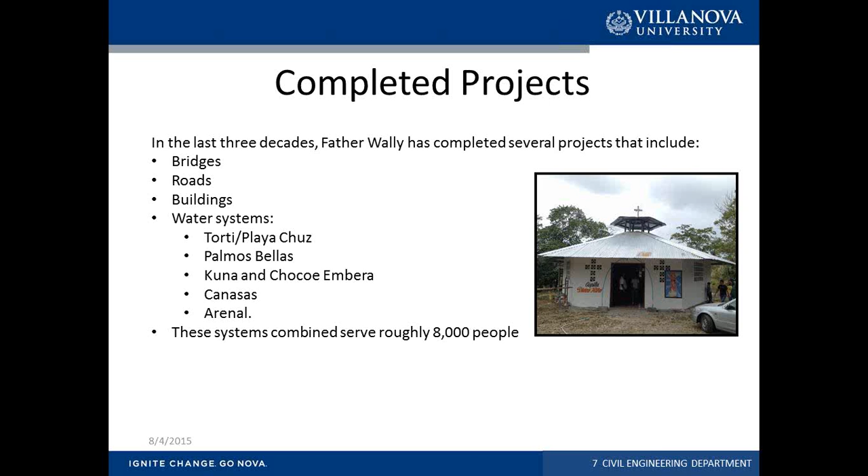The entire water distribution system is gravity fed, except for the new one, which we're working on right now, which I'll talk about later. Most of this area, you can see the blue lines are contour lines, so you can get an idea that everything to the left here are contours. It's very mountainous, steep mountainous area, and then it flattens out.

All of the area to the right is pasture, farmland. All the mountains are pretty forested with lumber, and one of the woods that's very prevalent there is teak. So there are people going into the mountains harvesting the teak wood. As a matter of fact, while we were there, this line down here was broken by the foresters, who actually ran over the line.

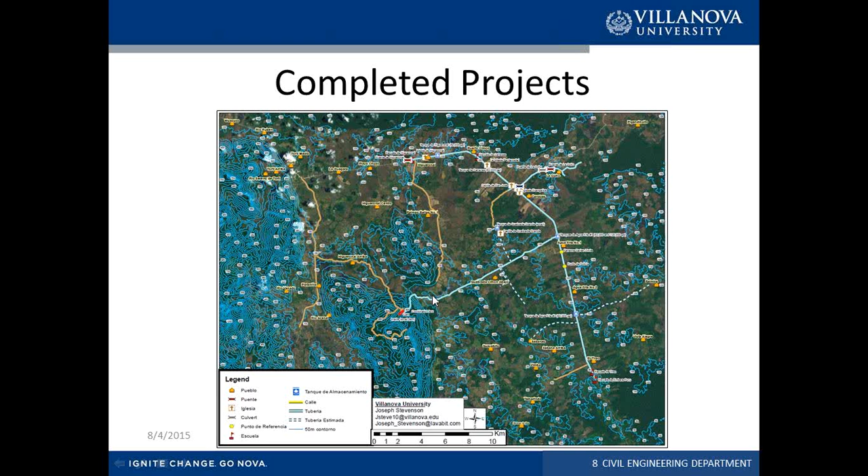While we were down there this past time, the Cañazas system was the main focus, and that is the system that on the previous map you saw coming through here. This is the dam that was designed by Villanova students, and then there's the water distribution system. Right now we're upgrading the system that currently serves 5,000 people and 13 communities with potable water that has pipe over 100 kilometers long, scattered all over. We're looking at increasing the capacity.

Now, one of the questions you may have is, what is the quality of this water? We have actually designed water purification into the system, and when our students went down there in March, the first thing we do is a settlement test, and we test to check for chlorides and all chemicals and bacteria in the water. We found that the water is still very clean and drinkable. As a matter of fact, when we were there, that's the water we would drink, and nobody got sick.

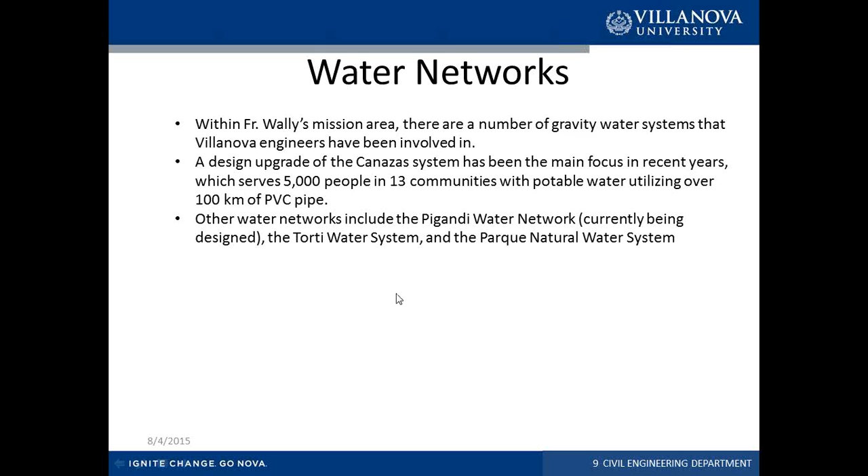This dam was designed in 2004, but we didn't start construction until 2009. And since 2009, every year he adds concrete to it to extend it up and horizontally so that we can get more water. Now, one of the things you'll see here is the water level looks really low.

We were pretty much at the end of the dry season in Panama. Panama has two seasons: one is the rainy season and the other is the dry season. The rainy season starts around June. So we were down there in March, and you can see what the level of the water is. Actually, during the summer, the water system will dry out, and then he has to truck water in from other sources to get water to his system. He actually trucks it to the different villages, and I'll show you a picture of that later.

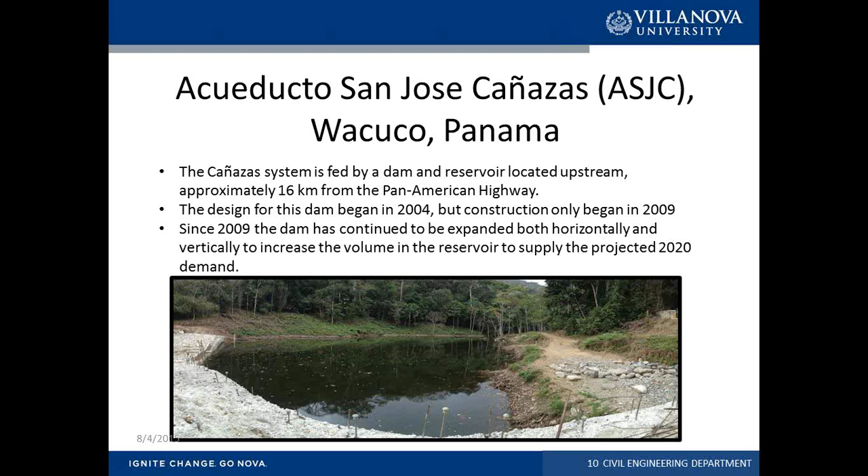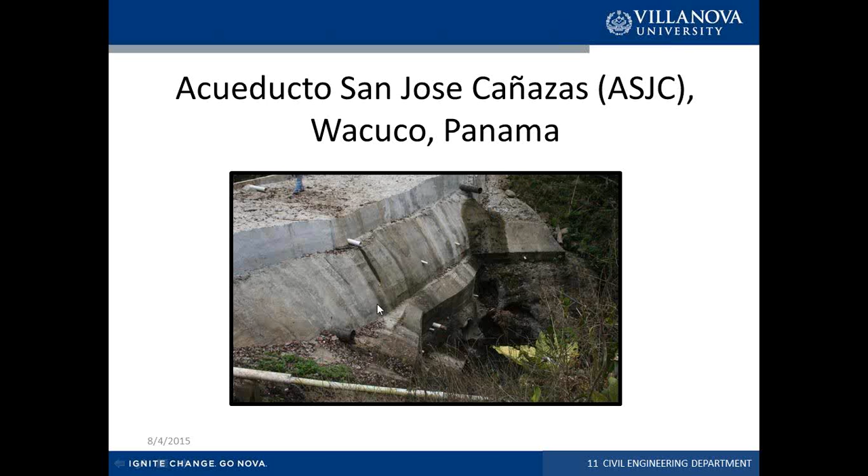So this is the pipe coming from the dam, and you can see here these are overflows, and you can see all the construction showing. Every year he'll add a few more feet to the dam so that he can increase the capacity.

Now, downstream of the existing dam, we've been constantly having pressure problems. As a matter of fact, when we were down there, one of the pipes had burst, and you can see our students helping Father Wally's crews repair the pipe that was down there. Our students right now from Water Resources are working on a break pressure tank for Father Wally and a system to reduce the pressure.

Father Wally has been doing this long enough that he has enough knowledge of what needs to be done, but what our students do under the guidance of Professor Falcone is actually design what the pressures are and what equipment is needed, then give the specifications to Father Wally, who acquires the materials and puts them in.

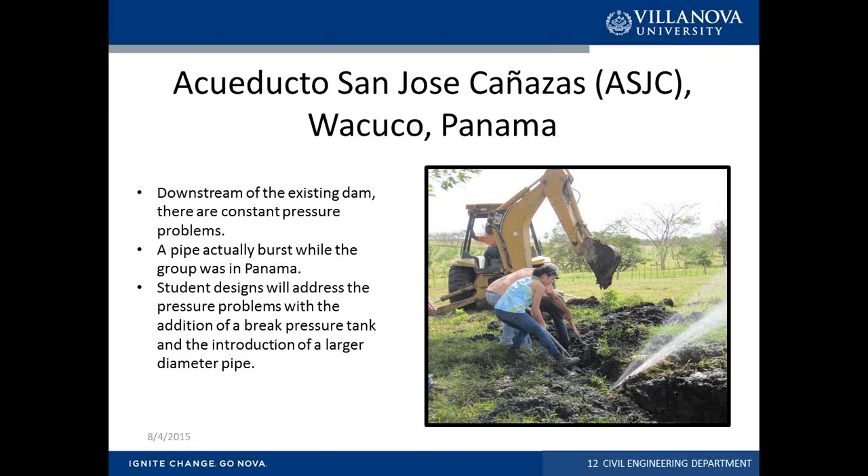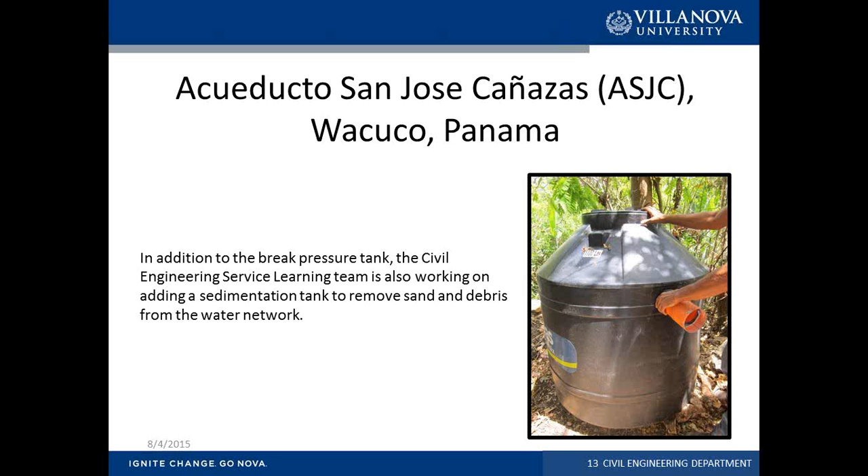The other thing, in addition to the break pressure tank, is that our students are also working on a sedimentation tank to remove the sand and debris. As you can see from that picture, the soil in this area is getting runoff from the mountain, and there's a lot of sand and other debris in it, so in order for it to settle out, we're adding some sedimentation tanks.

Towards the eastern end of the water distribution system is a small Indian village that, when we were there, was out of water. This is the area where the pipe had broken. So, to give you a little background, Father Wally has set up this entire water distribution system, but he's also set up a commission that oversees the operations of all this, which he sits on the board of.

And they actually collect money from everybody to pay for their water. He'll go to the villages once a month, and each village has the responsibility to collect the money. If people do not pay, then he will cut the water supply.

The people in this area had been without water for 2 weeks, and every week he had to come in and truck water. Now, you may ask what happens if somebody doesn't pay. Well, the first thing he'll do is shut off the water in that little box. After a month, if they still don't pay, he takes a hacksaw and cuts the PVC pipe so that they don't have water anymore. Then he charges them a steep rate to have the pipe reconnected.

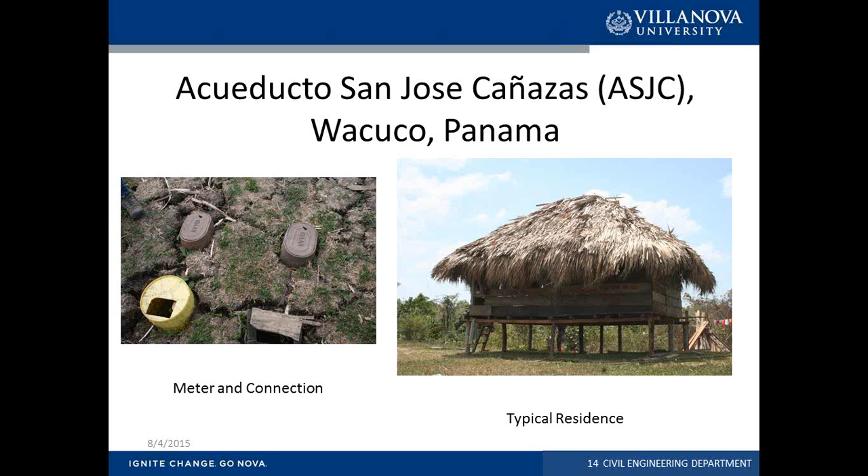Unlike the city of Panama City, this country of Panama has two different Panamas. There's Panama City, which is essentially part of the Panama Canal that the United States controlled for almost 100 years. And then there's all the Indian villages outside. This is typical of what you would see in the Indian villages.

Now here you can see the truck that once a week he would bring water out to these people, because even though the pipe was broken, these people still had to have water. This was an 8,000-gallon truck that he would bring in, and you can see all the 5-gallon pails that the truck would fill up, and each hut would get 5 or 6 of them.

You can see our Villanova students helping truck them in. It was a heck of an experience for our students because they got to see how people live, and it's different from where they live on the outside of Philadelphia in the northeast part of the United States, having cell phones and everything else. Where we were, there was very little cell service, no internet, no television. It was quite the experience.

Now, another distribution system in the process of being designed while we were there is the Pigandí, Panama system. In 2014, by accident, one of the farmers was digging and found a groundwater source, and he told Father Wally about it. Father Wally said, okay, I can come up with a system for you. Right now the area has no supply of clean water during the dry season, so with this well, he was going to be able to provide water to them.

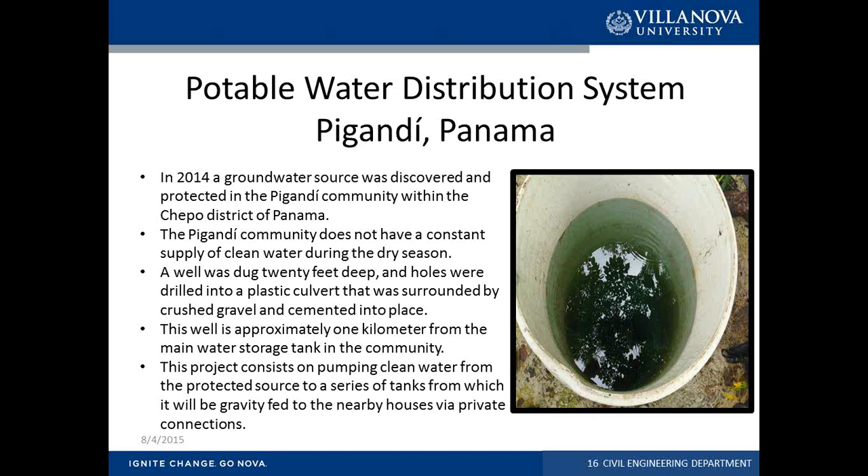The students that go here are seniors, juniors, sophomores, and freshmen. Mostly the seniors and juniors are doing the design, and the freshman and sophomore class is essentially there to learn everything that's going on so they can eventually take over the design of the additional parts of the project.

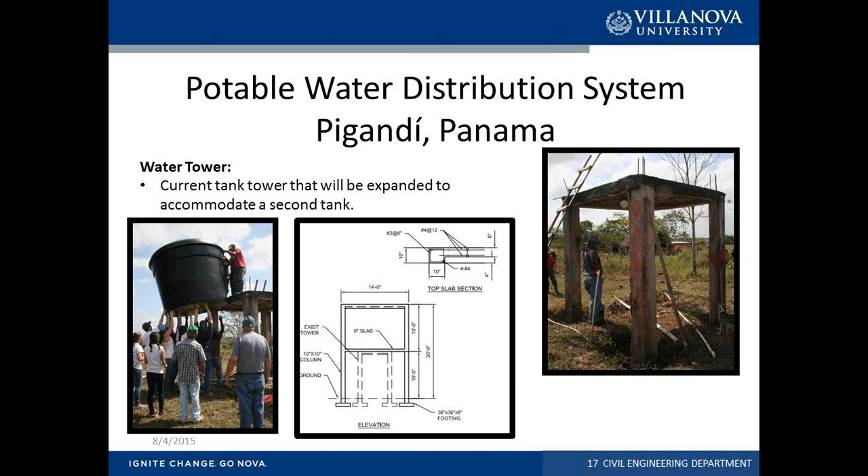What's interesting is that the construction methods down there are totally different from what we'd see here in the United States. So our students go down there, see how things are built, and have to change their design to meet those construction methods.

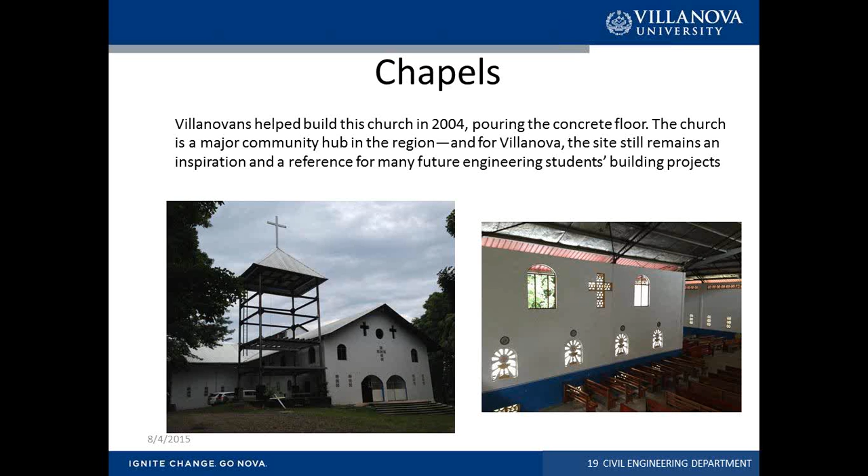It was quite an experience for our students, since they're used to seeing construction projects around here, and the methods and means available in Panama are much more limited than what we can do in the United States. So they have to understand his availability of materials and construction methods, and design something structurally adequate to take the wind loads and seismic loads required in the area.

One thing you'll notice here is a cross - it's essentially part of the design, and all the windows use the same block. They have no glass windows down there; in fact, most residents don't have glass at all. Everything is open air, and they may have screens just to keep the bugs out.

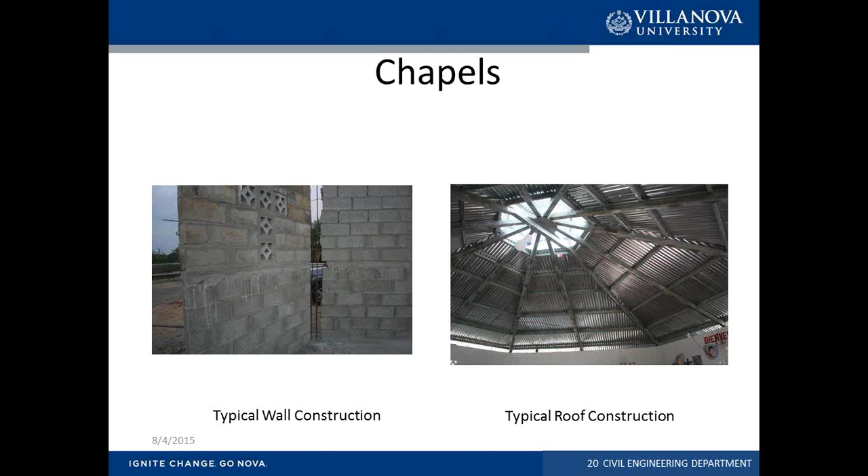On the right here is our roof construction with metal deck. These are maybe 8-inch metal studs welded together to form a beam. He does everything with light gauge metal, and very rarely, except for the major structures we saw before, does he use steel.

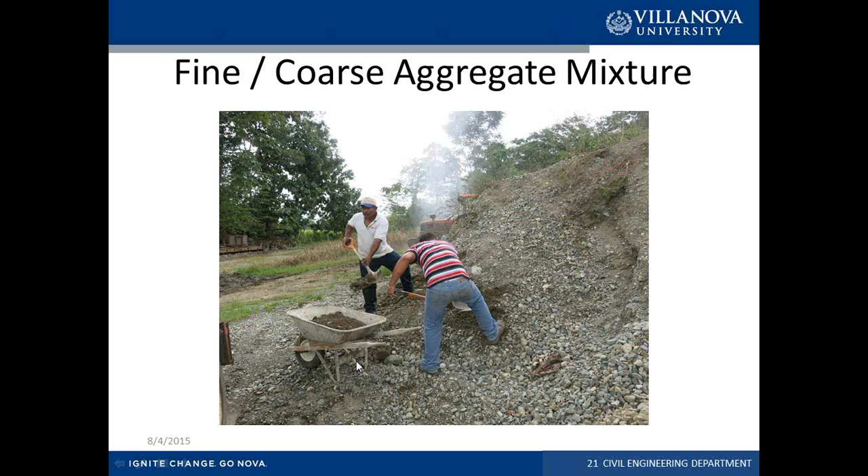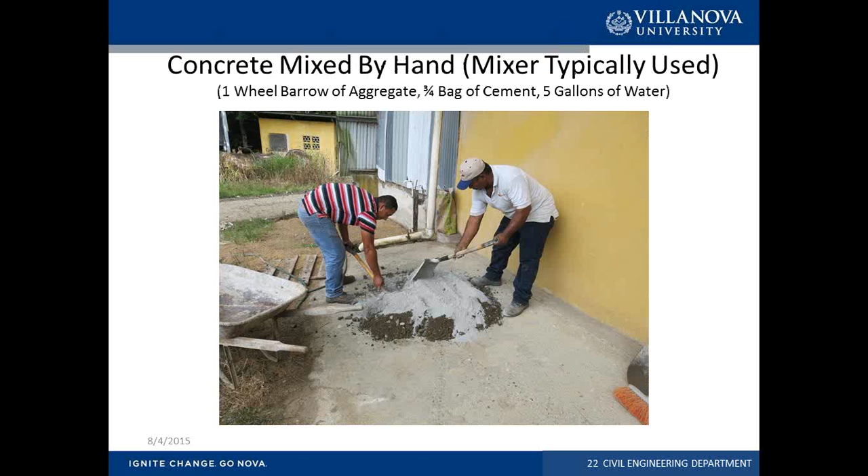Another very interesting thing is how he makes his concrete for his chapels. He has fine and coarse aggregate, and this is what it looks like - definitely not something you'd see at a PennDOT site. It's just piled up fine and coarse aggregate with a lot of silt in it. They dump it into a wheelbarrow, add cement and water, and hand mix it. The mix is 1 wheelbarrow of aggregate, 3/4 bag of cement, 5 gallons of water - and this is the concrete used for the chapels, for the beams and columns.

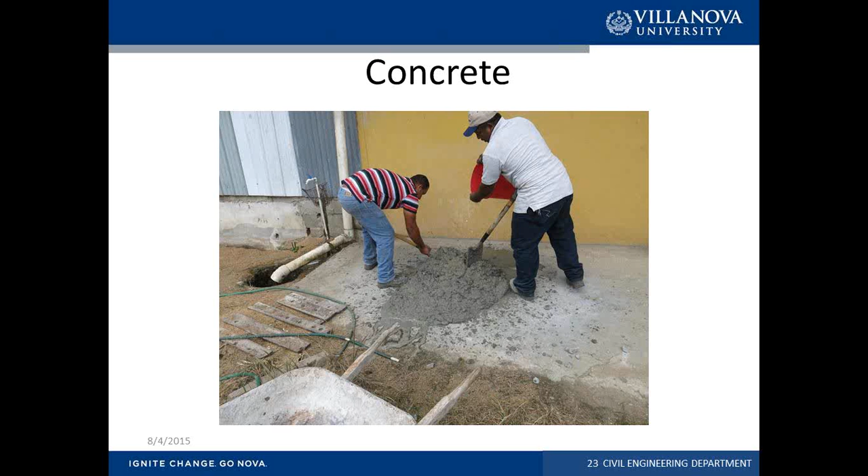Our students went down there two years ago and had them make concrete, made cylinders, and brought them back from Panama to Villanova to do testing. This is the result of our concrete testing - we brought back 5 cylinders, and you can see the failure stresses ranged between 2,500 and 1,800 PSI.

Based on this information, our students had to use this number to design all their concrete for the chapels, and we used 1,500 PSI as the allowable concrete strength.

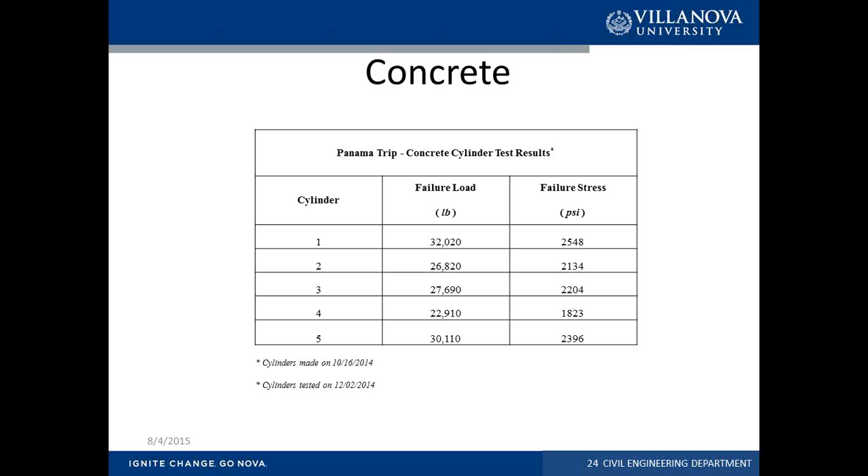Right now our students are designing three different styles of chapels that we're going to give to Father Wally. One is a square, one is a hexagon, and one is a circle, and he's going to use those in different communities. These chapels are used for community centers, for people to get together, and also during religious Sundays and other holidays to practice Mass.

Panama has a dry season and a rainy season. We were there in March, which was the dry season, very fortunate because you could get around. There are locations in Panama near where he lives that during the rainy season, entire villages are cut off from civilization.

So what we've been doing at Villanova for the past few years is designing bridges that he can construct. What you see on the left here is a low flow crossing. This stream you could walk across or drive across during the dry season, and once it starts to rain, the water would fill up. Not during the heaviest rain, but for about 9 to 10 months of the year, you could get by through this.

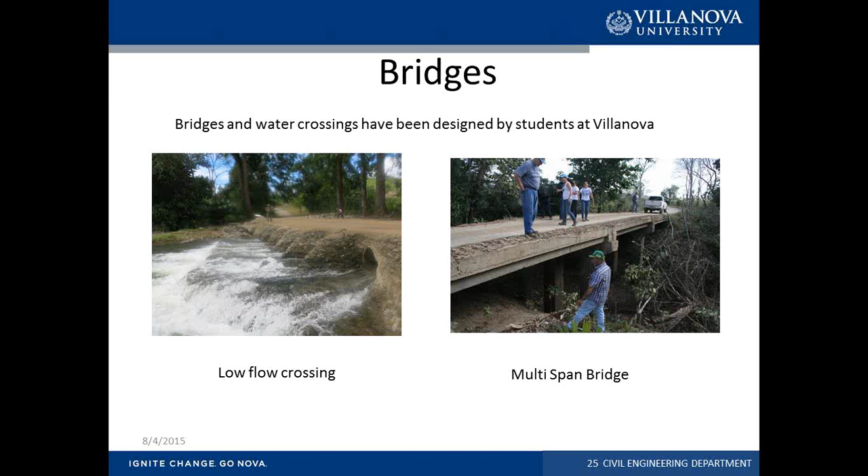As you can see, there's no railing on it or anything like that. We design everything to AASHTO standards as far as loading, but some of the other criteria not necessarily is a high concern. They're happy to have roads and bridges, and I'm sure the question of liability will come up during the Q&A, and we can talk about it then.

Normally what happens is one year the students will survey it, and then the next year during their senior year they'll actually do the design. This is last year's students doing surveying of the sites for the bridges we designed this past year that we're going to go over.

It's pretty impressive because I don't know what it's like at other universities, but at Villanova the only surveying they get is two weeks of surveying in a fundamentals class. So these students do pretty well. They do not use total stations, they use the old form of surveying equipment, and they're able to survey the sites enough that we can do the design.

This year we had two projects that we worked on: one was the Rio Jira, the other was the Rio Venado. The bridge openings from peak to peak on one was about 450 feet, and on the other from peak to peak was about 250 feet.

We did not do any hydraulics design on it because we could not get enough cross sections or enough information from the area to do hydraulics. But we talked to area residents and asked how high the water gets. During the rainy season, the water gets around 97, so you can see how high it gets and what kind of crossing we would need.

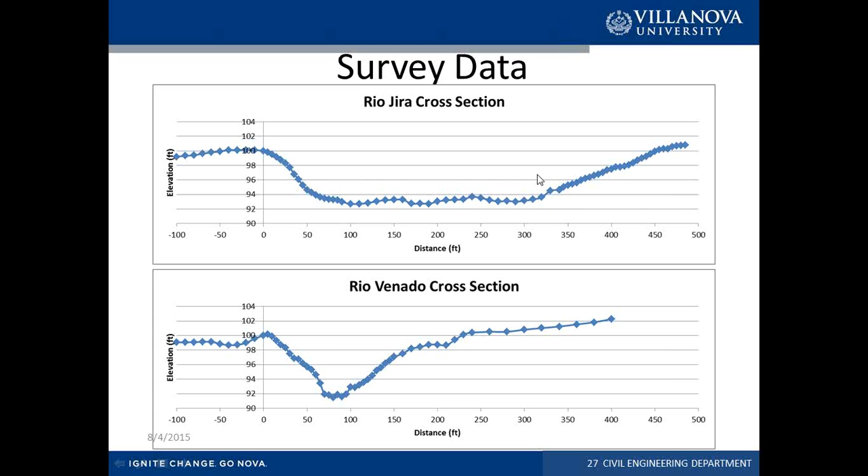And this one, about two-thirds of the low water crossing was scoured out. So our students this year wanted to get an idea of what the site was like, and you can see this red line here is approximately where the high water is, about 97.

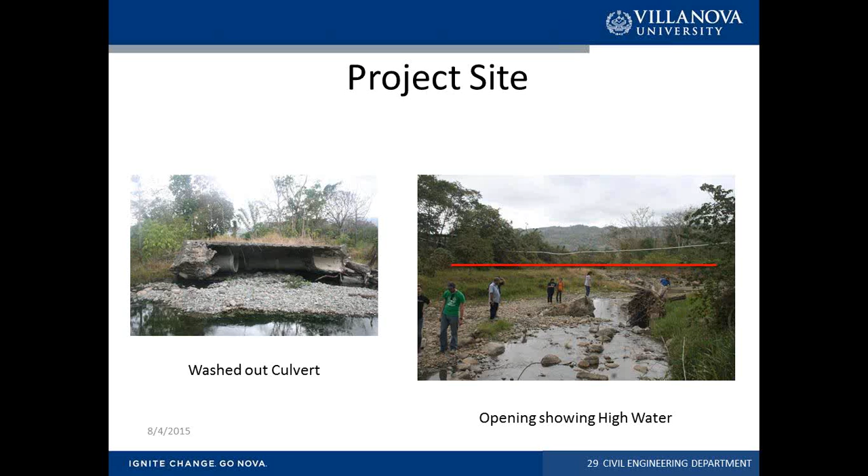Now, like I said before, Father Wally gets a lot of his material donated. This year we were very fortunate, or he was. Some of you may be aware there's a major expansion going on to the Panama Canal right now, and somehow there was a change in design, resulting in approximately 3 million pounds of beams that were not going to be used. They were already shipped down from the United States and sitting in Panama City.

The Ministry of Public Works, who has known about Father Wally's work for many years, said, look, I'm going to give you the opportunity to use these beams wherever you want. So he sent the list to us, and we instructed our students that this is what you have to use. You can see on the left-hand side the size, then the length, and how many he had of each of those lengths.

The beams were not what we would consider typical beams for bridge construction. In the United States the smallest beam you would use would be a 24-inch beam, and very rarely would you use that for a plate girder. Here we had 18-inch beams, 21-inch beams, and then some 24-inch beams.

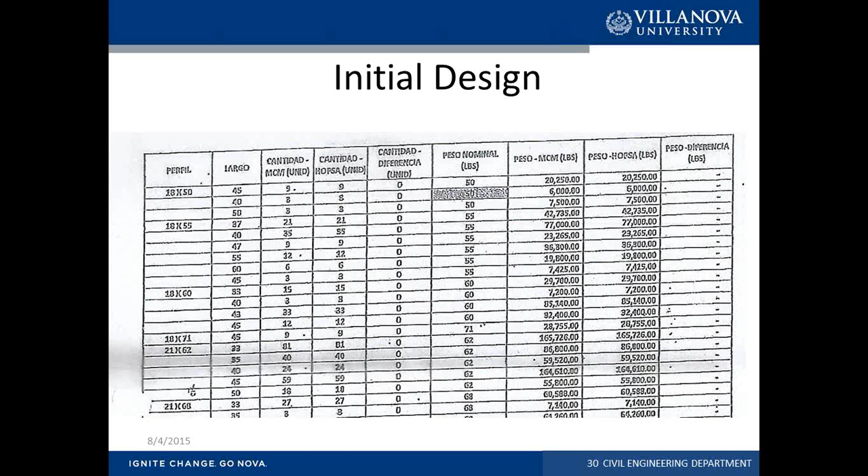So we had two groups of students working on the two bridges, and they had to work independently but also together off of that list of beams. This is the smaller of the two bridges, about 250 feet long.

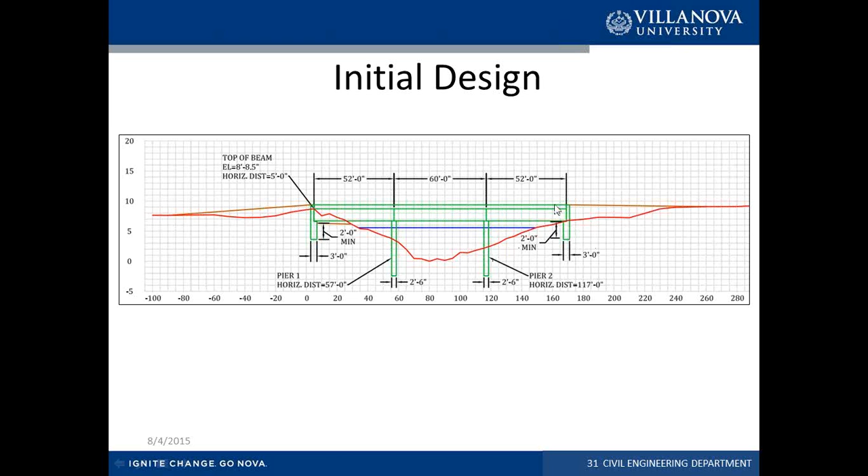Once you put the high water in, they had to build the bridge two feet above the anticipated high water. Based on the beams available, this is the initial design they came up with: two spans of 52 and one of 60. We tried to center it in the stream and keep it out of the stream as much as possible so debris didn't take down the walls, and then we had them fill in the approaches.

This is a typical cross-section of the bridge, using W21 by 73 beams. This was non-composite construction, and we did not design for HL93 loading per AASHTO, but instead designed for an H20 truck, not an HS20 truck, because that's typical of what you'd see on these roads.

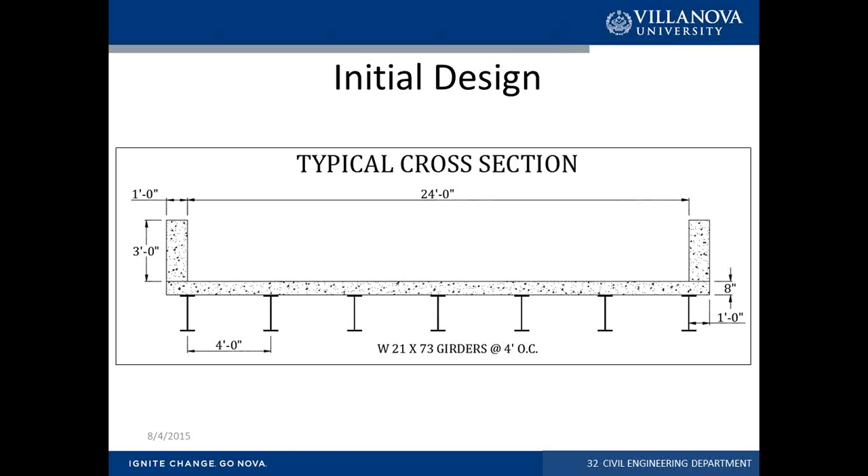Essentially the vehicles on these roads are Father Wally's trucks and maybe cattle trucks, that's it. Again, we tried to make the project as simple as possible so Father Wally could build it. We could have gone composite, but he doesn't have the means of welding shear studs on, and the other option would be welding channels onto it, which AASHTO allows, but we just didn't have the capability to do it.

What happens when you do a preliminary design and submit it to the client is the client's going to say yes or no. We met with them once they got to the site, and they realized our preliminary design was too short—the 60-foot span was too short. They wanted to clear span everything, the whole stream. So they came back and directed us to redesign it.

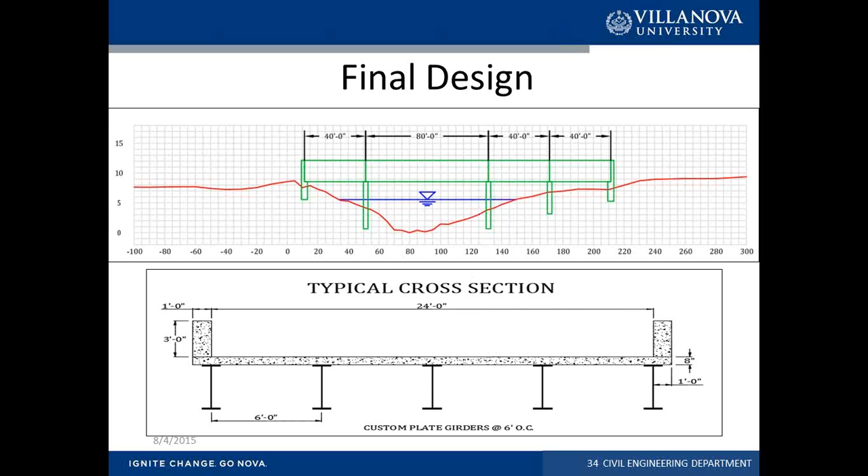This is what our new design was. They wanted 2 feet of clearance from the high water to the bottom of the beams, and they wanted us to clear span it. When we met with them we decided on an 80-foot span, with 40-foot spans as approaches. We were able to use some of the steel beams for the approaches, but the center span now required custom plate girders. So they had to redesign everything halfway through the semester.

And this is the final plate girder design that they came up with. Again, this was a non-composite design because of the limitations of what Father Wally has.

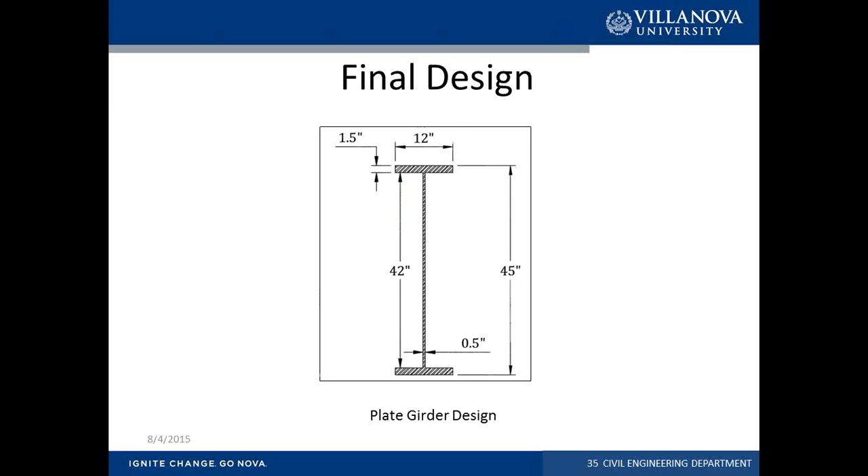So that pretty well gives you an idea of what our students at Villanova have been working on in Panama. And at this time, I'll open it up to questions.